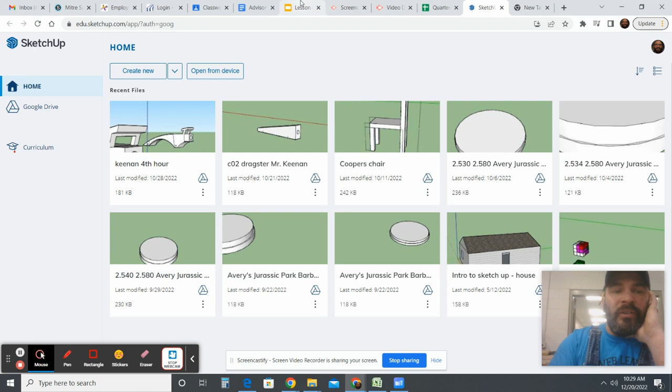First, you're gonna open up SketchUp. You can do that by clicking a new tab, clicking here, and then going down to where SketchUp is and clicking on it. Once it opens, if you haven't opened it yet, you're gonna need to log into Google. You need to connect your Google account, and then hit Start Modeling. If you've already done that, you'll click Create New.

It should already be in English units already for you. It would be helpful for you if you are creating this to get rid of the person that's standing there.

In order to do that, you need to be on the selector, the arrow. You're going to click on that and hit backspace.

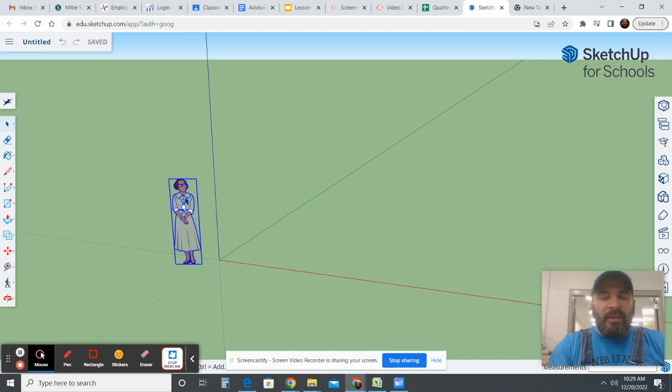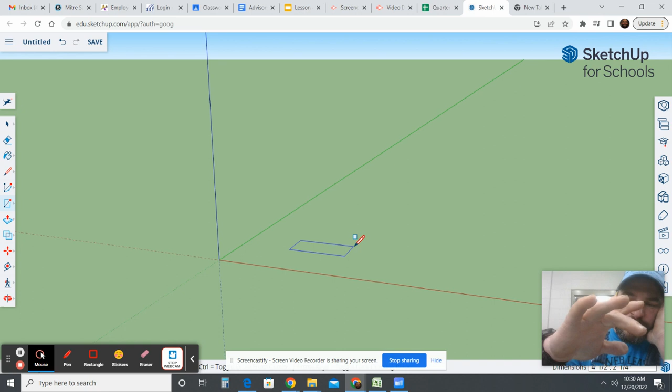Now we're going to create the footprint of it. The XYZ puzzle is 3.5 inches by 3/4 of an inch by 1/4 inch thick. So what we're gonna do is make a rectangle like this. You're gonna click on the screen once, then drag your mouse up and lift your hand up. Then you can just start typing in numbers.

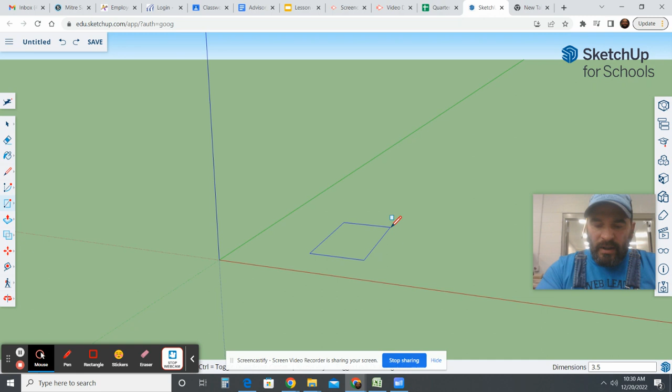Down here underneath where my video is are the dimensions. You can start typing in right away. We're gonna go 3.5, comma, space, and then... whoops, my number lock isn't on, I need to click back on. Hit escape, click back on here. I'm guessing I need to click off, then click on. We're gonna click on here, go 3.5, comma, space, 0.75, and then hit enter.

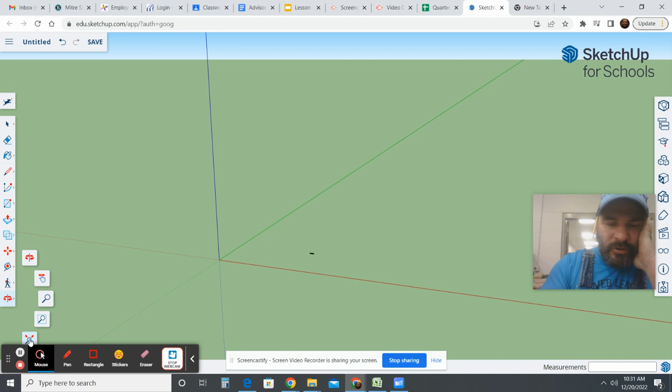What we just did is we created the little piece, and you see how small it is. There's a fast way to zoom in: if you click on the bottom tool on the toolbar, there's the zoom in with arrows pointing out. That will bring what you just created right up in front of you.

Now we're going to make this 3/4 inch by 1/4 of an inch thick. So you're going to grab push pull, just like this. This is your push pull tool - this is how you make things from 2D to 3D. You're going to click on that, now click on this - you see how it highlights when I go over top of it? Then click on it and move your mouse up, type in 0.25, and hit enter. Now we're going to hit escape.

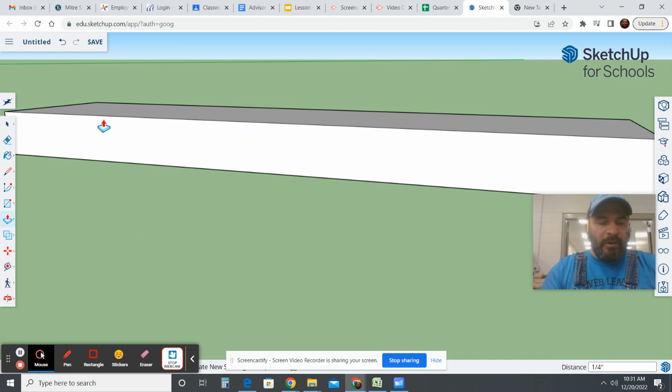This is one way to do it - there's a couple different ways you could do this, but this is one of the few ways you could do it. So now that we have that, we're going to orbit this using the orbit tool to orbit up like this. And if you need to zoom out, take your fingers and go together like this, it will zoom out.

Okay, we need to make our slot in the middle. So we're going to first go like this, click here, and move this way. I just clicked on my pencil, clicking on this edge. We're going to type in 1.375, which is the same thing as 1 and 3 divided by 8. Then we're going to hit enter.

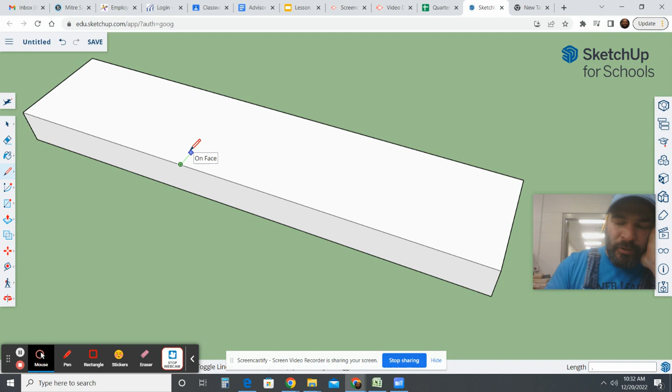Then we should find an end point right there. We're going to click here, click on the end point, and move this way. We're going to type in 0.25, hit enter, hit escape. Now we need to drop our tool - we have a point where this is going to be the corner of where that little slot is.

So now we're going to grab a rectangle again, and we're going to go like this.

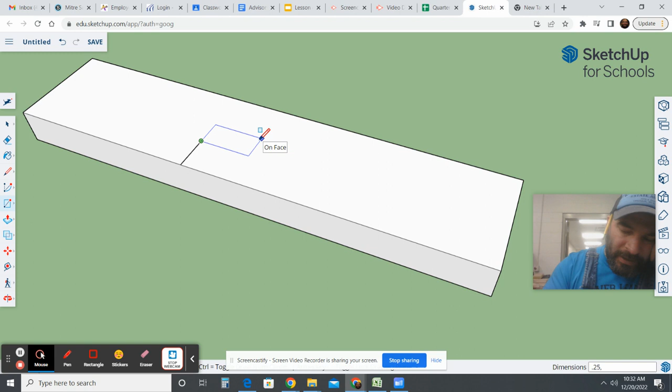There's several different ways we could draw it. We're going to start at this endpoint and move this way. We're going to type in 0.25, comma, space, 0.75, enter. Whoops, opposite. Hit escape, control Z.

We're going to click on this point again, then click off of this, drop the tool, and pick it back up again. Otherwise it will change the way that it gets drawn out.

So I'm going to click here. We're going to type in 0.25, comma, space, 0.75, enter. Whoops, opposite. I've got to do 0.75 first.

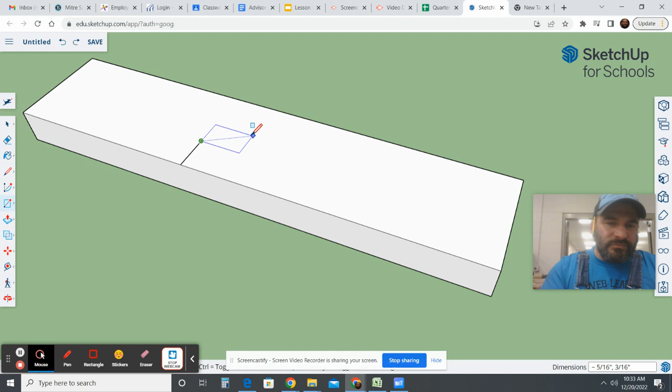Let's try it again. We're going to click here, click on the dot, 0.75, comma, space, 0.25, enter, hit escape.

Now I can delete this line. I can delete this line. We're going to hit delete, and then we're going to use our push pull. We're going to click on that center and go down like this. Click on the edge and it will delete that.

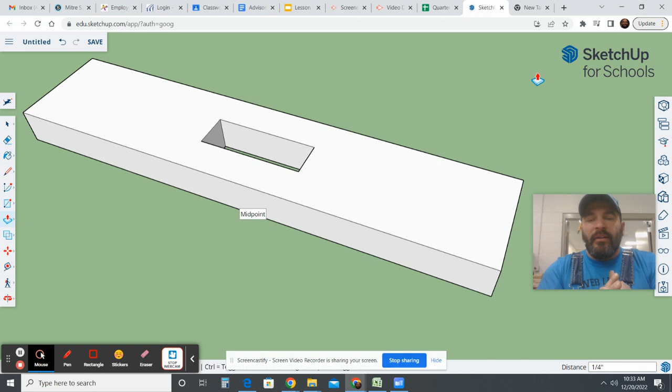Now, if we were to not do anything to this and try to move it around, it would change its shape. So we want to lock it in.

If you hit Control A, go on the selector tool, and then hit Control A, it should select everything. When it does, you put two fingers on your trackpad like that, and it'll bring this up. You can either do make component or make it a group. It doesn't matter which one you do, they both do the same thing.

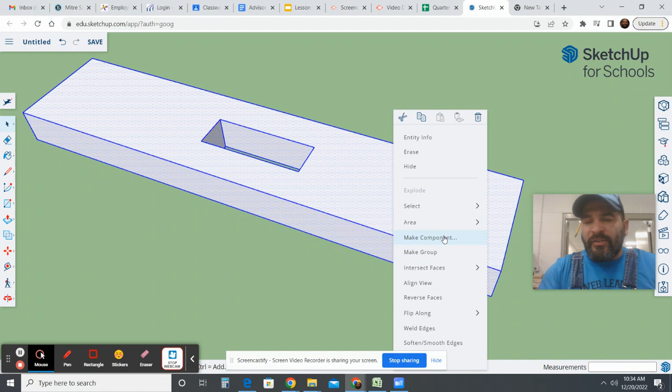If you make a group, it will lock all of it together. So now when we grab a hold of this so we can move it around, it will lock it all together. Okay, that's how to do the close end.

To do the open end, you're going to basically do the exact same thing, except once you do this, you're going to measure in 0.25.

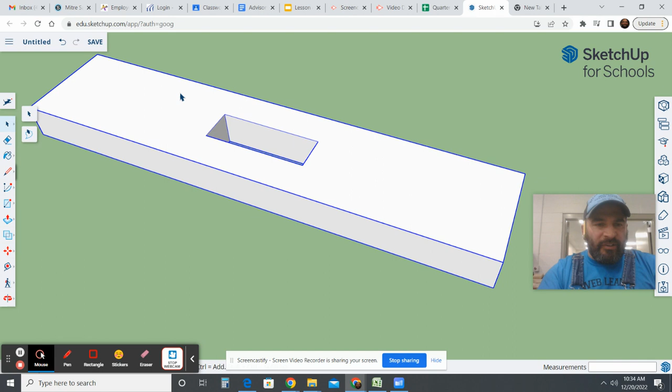Right now it's selected, so we're going to do Control C and then Control V. That just pastes it just like this. We're going to put it right here, then hit escape.

Now we're going to grab a pencil. We're going to start here, go this way. We're going to type in 0.25, hit enter, hit escape.

We're going to click on that point, come down this way to the edge, 0.25, enter, hit escape.

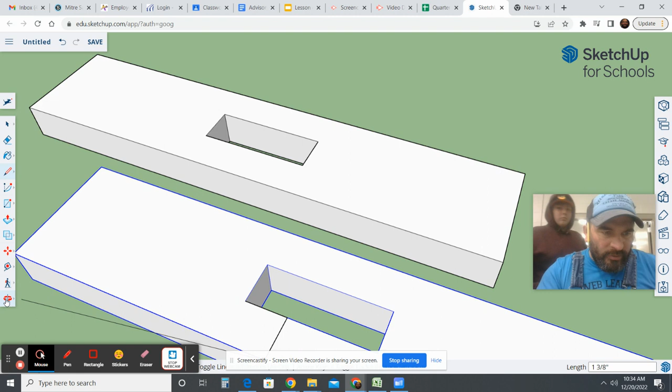Then we need to move this over, so you can grab the hand and pull this over this way, hit escape.

Now we're going to go back to the pencil, come this way, 0.25, enter, and then go up like this, click on that, and then hit escape.

Now we can grab our push-pull. We should be able to click on this. Nope, not yet. We're going to have to draw a line on the top, just like this.

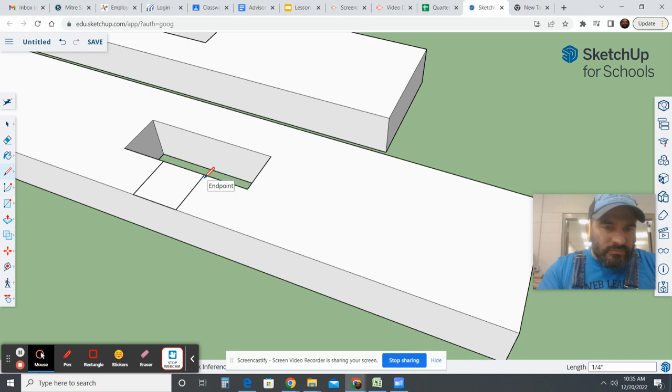Now we should be able to do push-pull on that, hopefully. Yep, click on that, bring it all the way down like this. And that's how you could potentially delete that.

I will come back and we will draw the open piece, but that's how I already showed you how to do the closed piece.

I'm going to save it and I'm going to make it XYZ puzzle on here. And then once you have that, it's easy to export it to an STL so you can 3D print it.

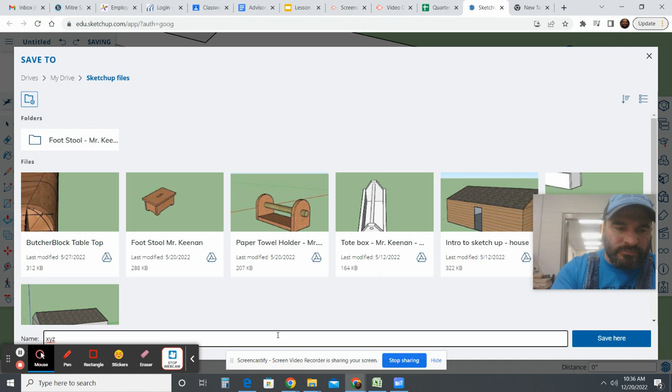But now, so we're just going to do, I think I had one that's SketchUp files, just like that. We're going to change the name, XYZ puzzle. And then we hit save.

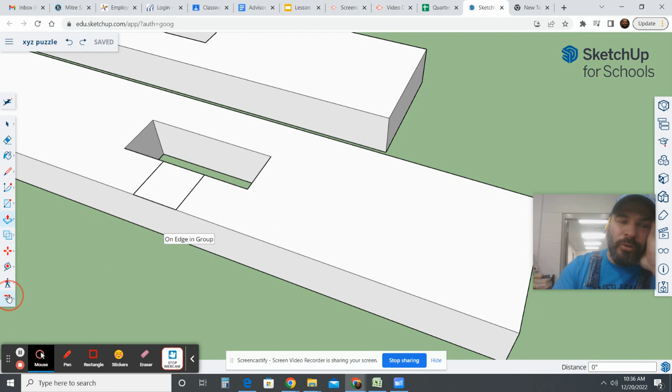Okay, in order to make this 3D printed, you can do each one individually or you can do them all at once. I'll come back in and I'll create the open end. Right now I've created the close end. If we go to this part and do zoom out, you can see the whole thing.

We just have to modify this to do it, but now it's time to start class, so we'll have to do the second part later.